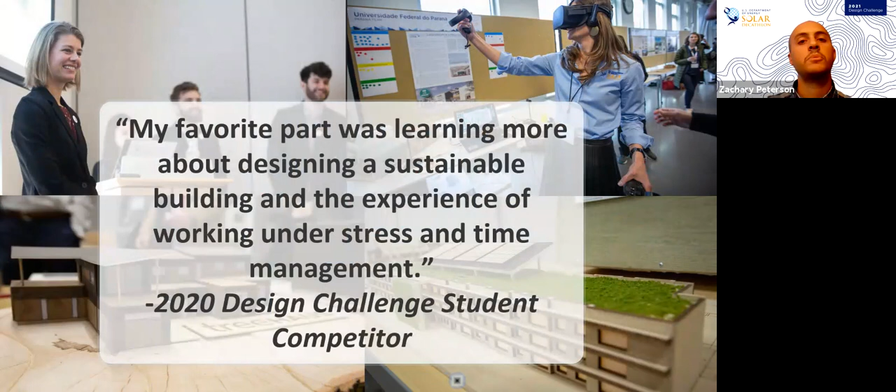So this typically includes engineers and architects, construction management students, business students, and they work together to do things like develop floor plans and design renderings and talk with clients about their needs and present their ideas. And industry partnership is a huge aspect of this. So we encourage all teams to work with a number of industry partners.

This could be builders, this could be city officials, energy auditors, landscapers, all different types of people from industry who can help them and provide feedback and review their designs and help them improve their solutions. And this really helps to develop a cycle of career connections for the student teams and help them develop their professional networks. So not only with the students, but also the jurors.

Well, we're excited to announce that we're continuing our Design Partners program. And this is a unique form of industry partnership where an organization or a builder might have a planned or expected project in their portfolio, and they connect with the team and work with this team to define the design criteria and come up with a zero energy design alternative.

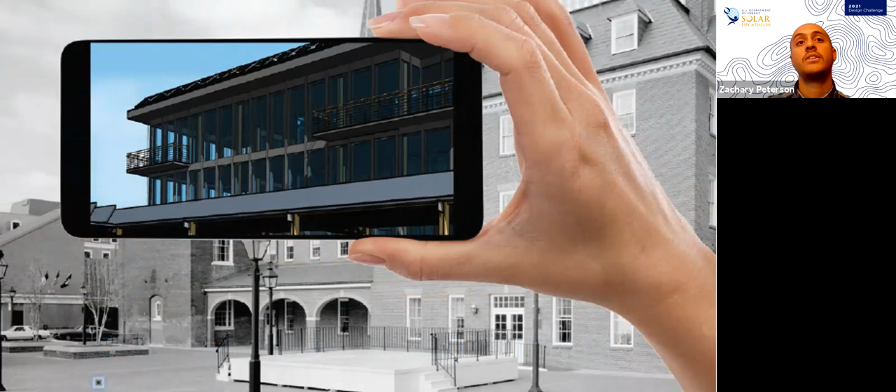And what's awesome about this project is it helps increase adoption of zero energy buildings because it helps reduce this fear of the unknown that some organizations or builders might have with developing a zero energy design and what goes into that and how much it costs. And so there's a low risk opportunity. And so as a design partner, you get to explore these zero energy topics. You get to explore these designs.

You get a design that shows you what are the utility bill costs? What is the lifetime energy consumption? How does this compare to something you typically see? And meanwhile, you are helping train the future generation of builders. So you might be thinking, well, what's the catch? There really isn't one. This isn't a huge lift for the design partner.

We're asking for 20 to 30 hours of commitment over the competition period, which isn't a huge bit of effort, but to help the students really dial in on what you are looking for. And so, Amanda, how can folks get involved with this? Yeah, so how it works is an organization interested in applying to become a design partner can go to solardecathlon.gov and find the design partner project application where they fill out project requirements and contact info that we can then share with the teams.

Following that, the student design teams interested in collaborating with the design partner will reach out to you with that contact information you provided and begin that initial connection and establish a partnership. Once that partnership is established, the design partner works with the student design team and meets with them over the next 4 months to go over iterations of the design, and the design partner attends design charrettes and provides review to the student design team as they go through the design process until the final competition event in April.

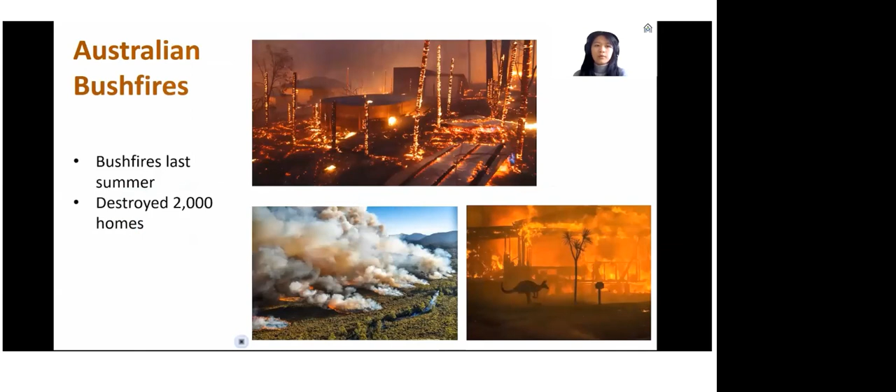Hi, we're Surreal Estate and we'll be presenting to you our single suburban family home design from the Solar Decathlon last year. I'm Sarah and presenting with me today are Sandy and Shrishti. Our team is a multidisciplinary team that came together in 2019. We draw our knowledge and skill sets from a variety of disciplines, including architecture, civil, mechanical, and materials engineering, as well as science. We come from Monash University in Melbourne, Australia. As I'm sure you'll all remember, the Australian bushfires last summer were devastating, not only taking the lives of many, but also destroying over 2,000 homes. To address this, we wanted to create a bushfire resilient home that was affordable for young Australian families.

So our main approach to making this net zero energy house affordable and accessible for these young Australian families was to implement various passive energy reduction strategies throughout the home, and we adapted it to be suitable for the local Australian climate. To do this, we took a holistic approach to our design, thinking about the before, during, and after a bushfire.

So not only do we have preventative measures in place before a bushfire occurs, we also made sure that our house is resilient during and after a bushfire. So some examples of preventative strategies include a 15-feet fire break that keeps the house away from high energy sources, as well as a gutter guard that minimizes the accumulation of debris in the gutter that can cause the roof of the house to catch on fire.

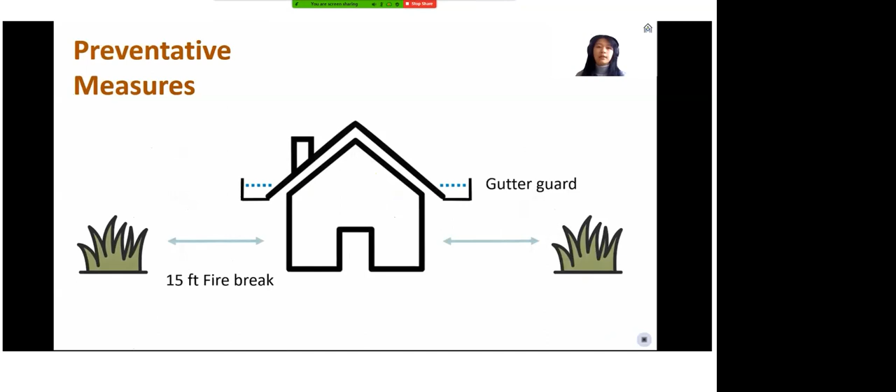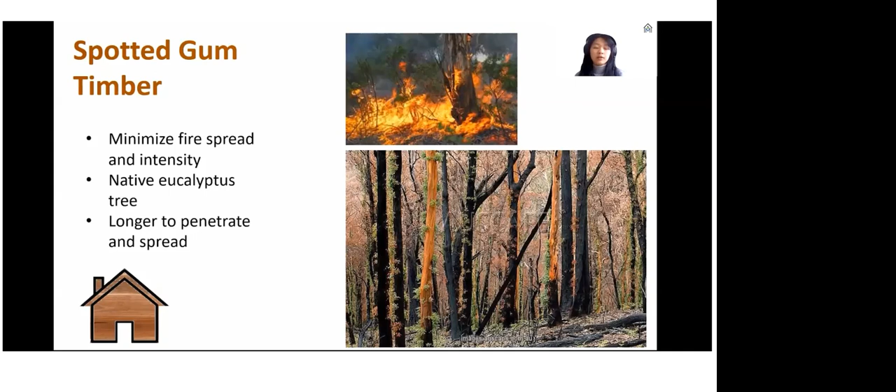If these preventative measures are breached and the house does catch on fire, we want to minimize the fire spread and fire intensity as much as possible. This is why we have most of our house constructed from spotted gum timber. It's a native eucalyptus tree that can survive bushfires because it takes so much longer for the fire to penetrate and spread than other common species of timber.

So not only do we want to minimize damage to the house, we want to prioritize occupant safety. This is why we have things such as an external sprinkler system and large casement windows for the occupants to safely escape. Now, let's consider the aftermath of a bushfire. Even though the house may be damaged, another reason why we chose spotted gum timber for a bushfire resilient house is that it's much easier to reconstruct and restore a timber structure compared to other sustainable materials, as ironic as it may seem that we're using wood for bushfire resilience.

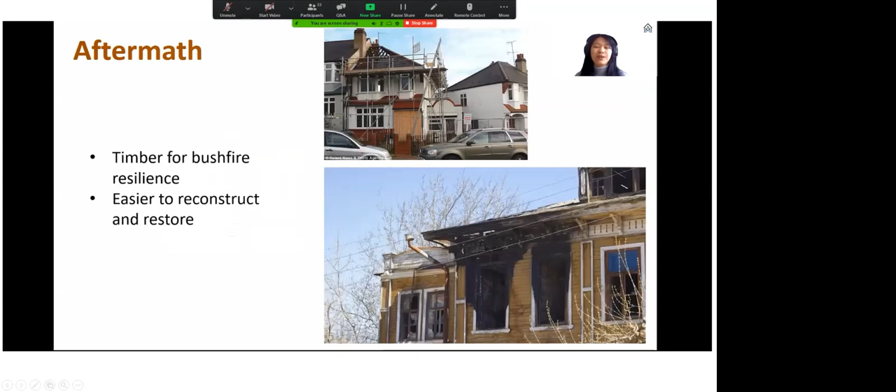Another concern is the water shortages that are likely to follow a bushfire, which was the case last year. That's why we have our 1,800 gallon rainwater tank, which is not only a staple in Australian backyards, it will allow the occupants to go off-grid for 2 to 3 weeks. Now I'll pass it on to Sandy.

Thanks, Sarah. So we wanted to know how much a bushfire-resistant home would cost the average new Australian family. Melbourne's housing market is ranked as one of the most severely unaffordable in the world, and this is based on the house price to income ratio. It can be roughly compared to the house market in Santa Cruz, and this makes affordability all the more important.

We designed this house for the suburb of Tarneit in Melbourne, Australia. A review by The Australian estimated that Tarneit was one of the suburbs tipped to experience above average growth in the next 12 months. We chose Tarneit because it is predicted to be 15% more affordable than inner city Melbourne. This makes it perfect for our particular demographic.

The total construction costs are approximately $196,000, and this is just over the lowest bracket cost to build a home in Victoria. The average home in Tarneit costs approximately $277,000. We believe this is a conservative estimate and suitable for the mean household income in this area. Now I'll pass you over to Shrishti to discuss our sustainable strategies.

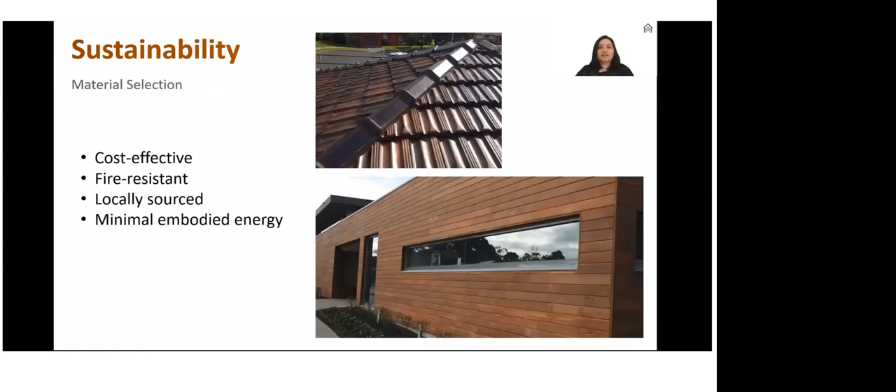Thanks, Sandy. The materials chosen were compared for their architectural properties, overall cost, recyclability, and most importantly, fire resistance. We chose to ensure that all the materials were locally sourced to support Australian businesses and to reduce energy costs. The materials were then meticulously refined to veto non-renewable materials and minimize embodied energy.

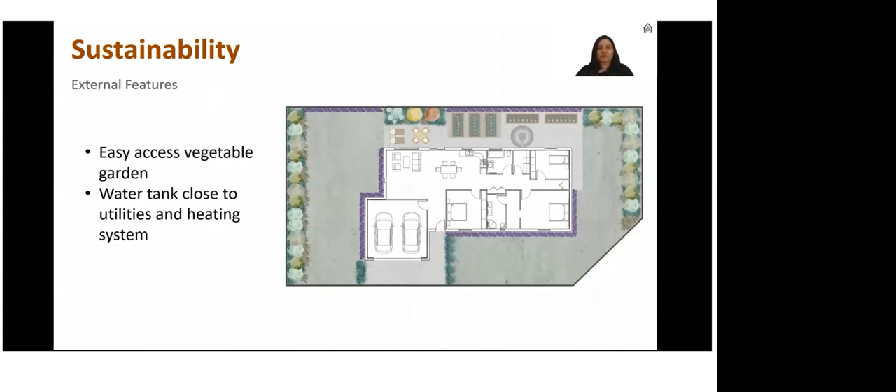By including a vegetable garden and a water tank, we encourage agricultural education and a self-sustaining lifestyle. Additionally, the water tank was situated in close proximity to our water heating system and our utilities for easy everyday use of reclaimed water. One innovation that our team decided to use was the introduction of an app. This app gamified water usage and energy conservation, thereby creating a family-friendly way to promote a more resource-conservative lifestyle.

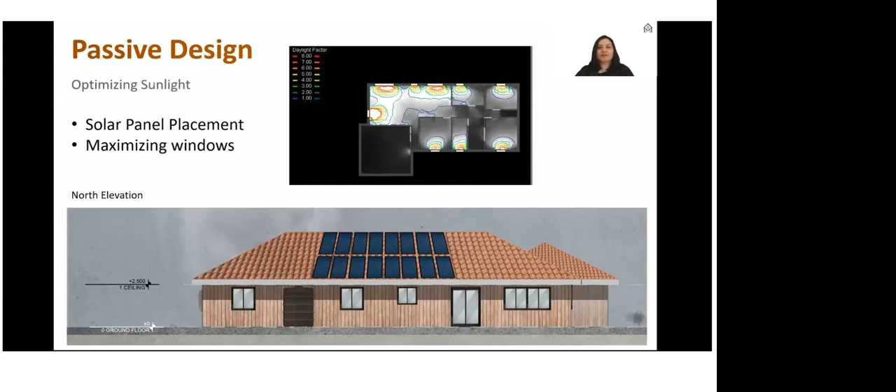While the features of the house were important in maintaining sustainability, the inherent design optimized the use of natural resources for passive energy reduction. One passive energy reduction strategy was to maximize thermal energy from the sun by utilizing the north-facing side, as this side gains the most sunlight in the southern hemisphere. Placing larger windows on the northern front optimized passive heating from the low-lying sun in Australia's cold winter months. This also minimized sunlight penetration during the summer.

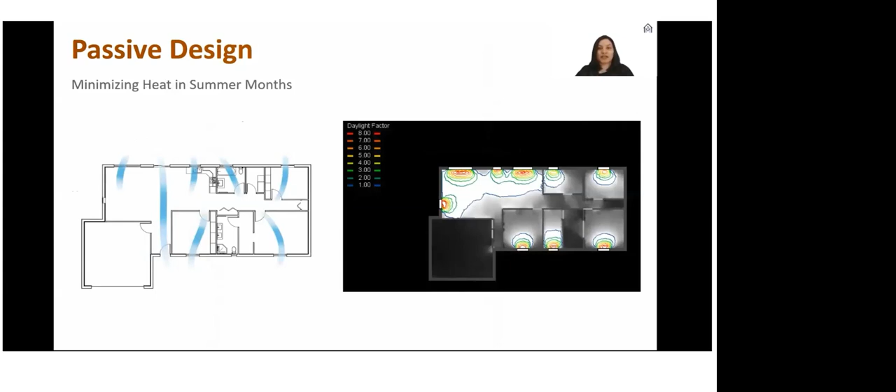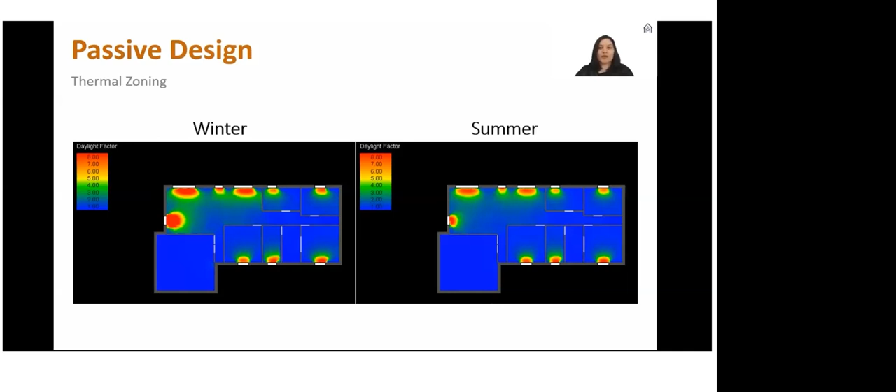By also including pathways for plenty of cross-ventilation, we further mitigated the retention of heat in Australia's hot and dry summer months, thus allowing families to enjoy a cool and comfortable internal temperature range without excessive use of the air conditioning system. Additionally, we chose to implement thermal zoning as a feature to help conserve energy. Each room was designed to ensure that only the spaces that were being occupied were being air-conditioned or actively heated. This removed the issue of wasted energy, wasted heat, and wasted cooling.

Another strategy that we implemented was to ensure that all of our water utilities were centralized as much as possible. This further minimized heat loss from hot water traveling through our plumbing, and thereby reduced the amount of materials required for the construction of internal water systems of the house.

In conclusion, we have designed a resilient home for young Australian families, one with net zero energy, affordable pricing, and necessary fire resistance for an ever-changing Australian climate.

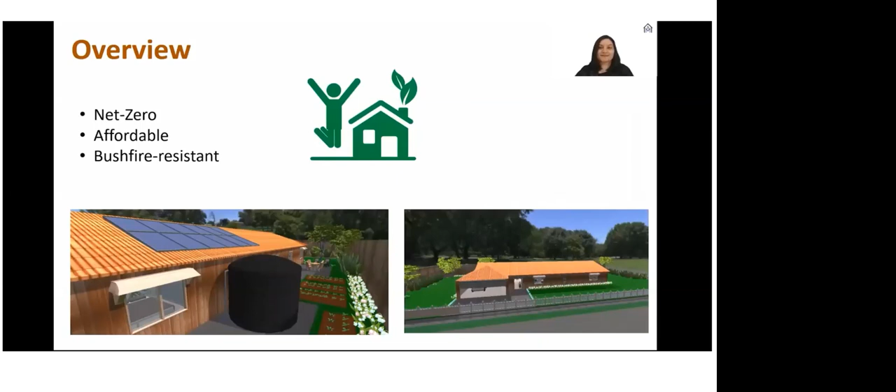Wow, what a presentation. That was awesome. Thanks to the Surreal Estate team. As we said, unfortunately, they're not around to answer questions at this moment. They're probably all in their beds and sleeping right now. But if folks do have questions out there, we would love to connect you with them or send those to them and close the loop on that.

But we will keep moving here on to the division winner in the mixed use multifamily division, the University of Arizona. So this was Team Sunblock with the University of Arizona, and their design on the loop delivered a realistic design portfolio and honored the Southwestern vernacular. Ellie Franzen and Rachel Schultz will be presenting their team's design, the loop. Ellie and Rachel, are you all ready?

Hi there, can you guys enable our video? Yeah, I'm sure someone's working on that in the back end here. I can do that. We can hear you all right. Okay, now there we go. Perfect. There we go. Yep. So we have the slides up. Are you guys ready? Oh, we are ready. Yes. Okay, there you go. All right. Okay.

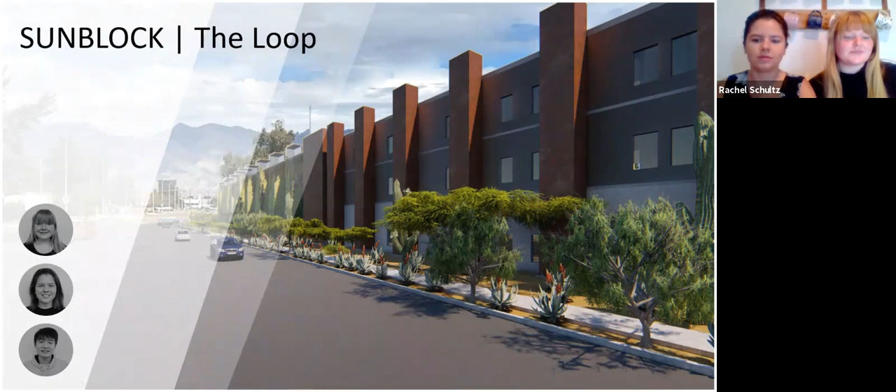Hi, I'm Ellie Franzen. And I'm Rachel Schultz. We're excited to share our project Sunblock at the Loop with you. This project was our first attempt at creating a mixed-use multi-family housing development that helps sustain its neighborhoods by providing solar energy, community spaces, and social resources. Our hometown is Tucson, Arizona, 2 hours south of Phoenix. The site we chose represents familiar challenges faced by American cities suffering from increased urban sprawl, a lack of walkability, and a lack of public infrastructure.

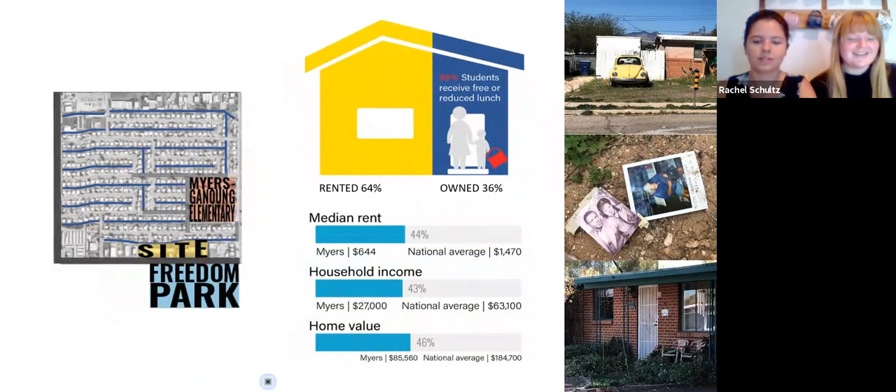Our site was originally home to a vacant strip mall resting on 250,000 square feet of asphalt. The surrounding Myers neighborhood is a diverse and vibrant community with Myers Elementary School and Freedom Park as some of its only community resources. Made up of 396 low-income homes, families in the Myers earned 43% of the United States average median income. These homes, resources, and our site are connected by utility easements. We approached this project with an understanding of Tucson's unsustainable growth pattern shown on the diagram on the left, which allowed us to see where we can make efficient changes and redirect Tucson and other urban city centers.

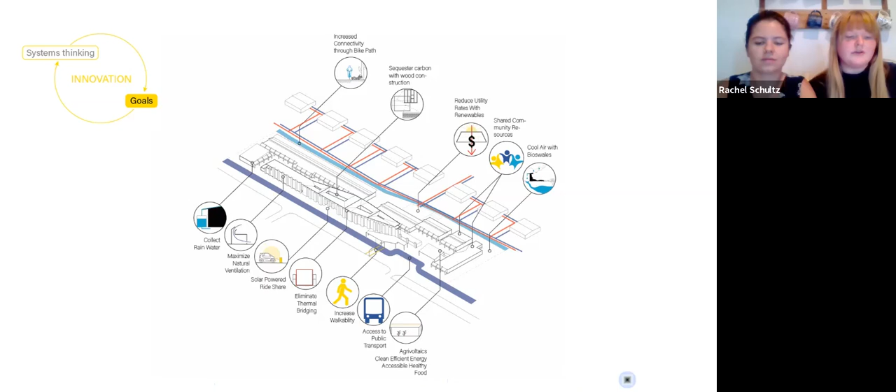These categories have a unique and important relationship with each other, coming together to create a system where each component plays a role in the project. By viewing each category as a part of a whole picture, we can maximize the benefits of individual elements and create a better whole. In combination with the district energy system, Sunblock, this project is proposing an innovative growth template for low-density cities and suburbs. The proposed template encourages builders to design locally, taking advantage of material, thermal, and environmental processes already present. The loop is successful thanks to a set of goals that prioritize sustainability and community among its residents internally, as well as the surrounding Myers neighborhood externally. Our goals coming into the project manifested themselves in a retrofit of the existing strip mall alongside a new build, both performing at PHIUS 2018+ standards.

The Sunblock District Energy System proposes using the excess solar energy produced during the middle of the day to heat or chill water that is then stored and used to condition the Myers neighborhood. By producing enough solar energy with on-site PV arrays shown in yellow, we can cleanly condition the entire Myers neighborhood. To maximize energy use efficiency when conditioning with cost-effective balanced ventilation, creative solutions are utilized in both residential and commercial spaces. In the office, supply ducts run under a raised platform and air is exhausted near the ceiling, creating a natural convection loop.

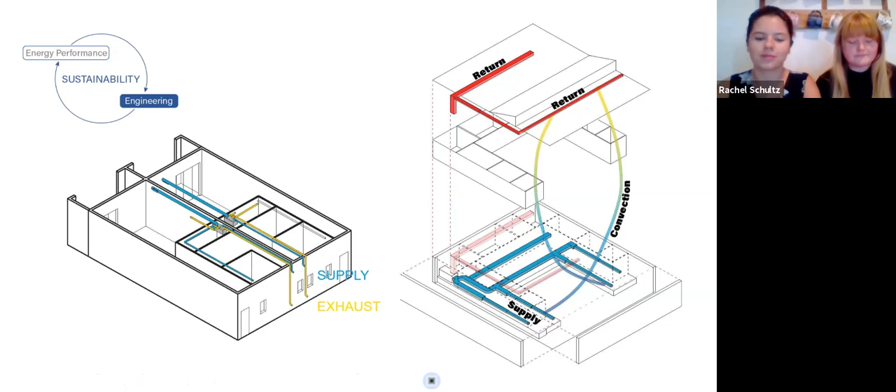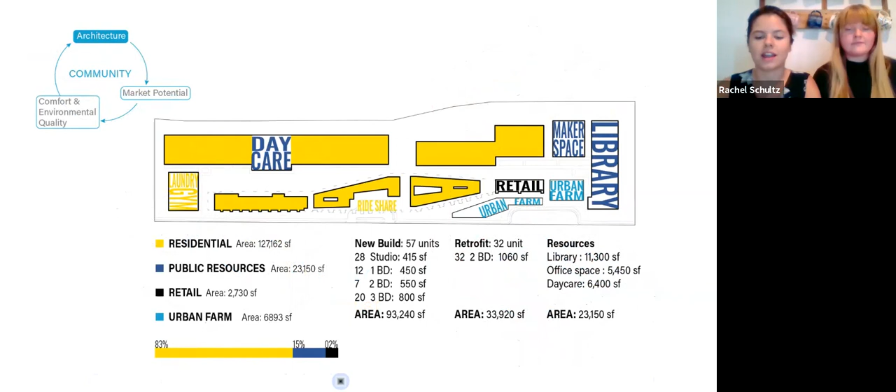In total, the loop offers 89 units consisting of studios as well as 2 and 3 bedroom units. These are centered around our daycare and community resources. The right side of the lot offers public resources to the surrounding neighborhood, including an agrivoltaic urban farm, bus stop, library, retail, and office space.

The new build celebrates passive natural ventilation with recycled metal solar chimneys serving residential units on the southwest facade. These chimneys reference the local tradition of using rusted metals while also taking advantage of its recyclability and resilience. This language is continued down the south facade with shaded patio spaces clad in recycled metal and native vines.

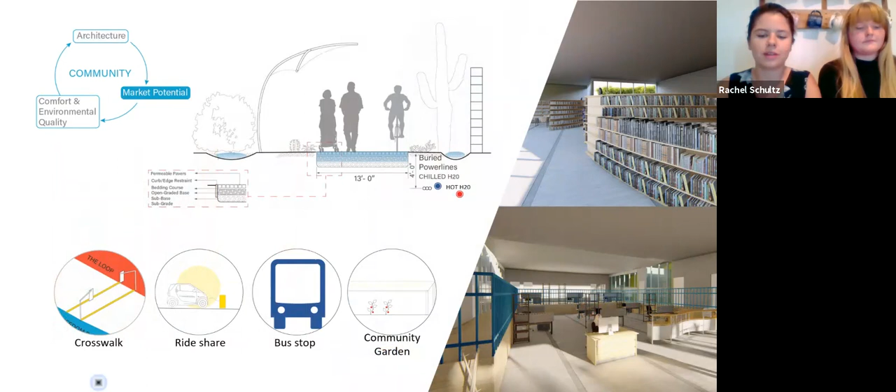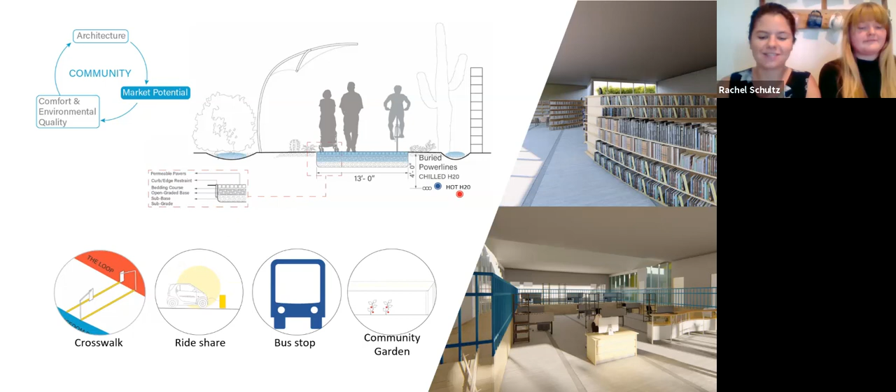The Loop offers community resources on site, such as an office, retail space, daycare, and public library. These resources connect residents to their city by improving public transportation in a car-dependent urban setting. This is accomplished through an electric car rideshare, a new crosswalk, a reimagined bus stop that includes a community garden, and an extensive bike path designed from existing utility easements.

The Loop focuses on the Myers community while also acknowledging Tucson's need for affordable housing. Our rent reduction program allows us to cater to three often overlooked demographics, including single-parent households, the elderly, and Tucson residents who can no longer afford the rising cost of housing.

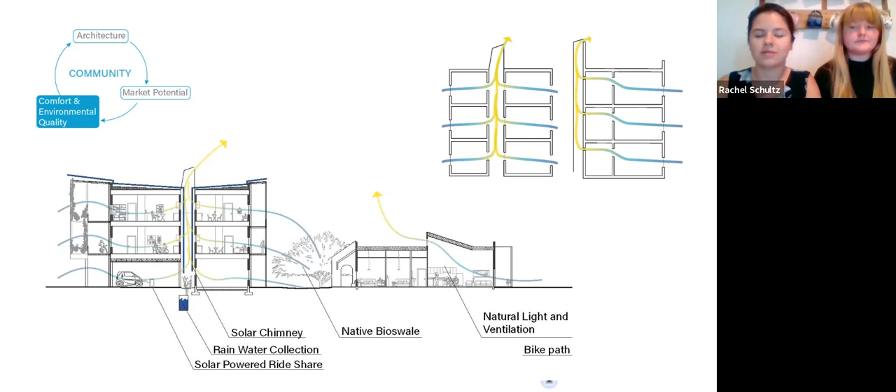Blurring the lines between indoors and out helps us understand how the outdoor environment can reduce our energy usage while also providing a pleasant place to live. Lush bioswales and solar chimneys strategically placed on site work together to create a comfortable environment. Within each unit, design choices like VOC-free and natural building materials, natural daylight, and balanced ventilation, along with natural ventilation, come together to create a comfortable indoor environment for residents.

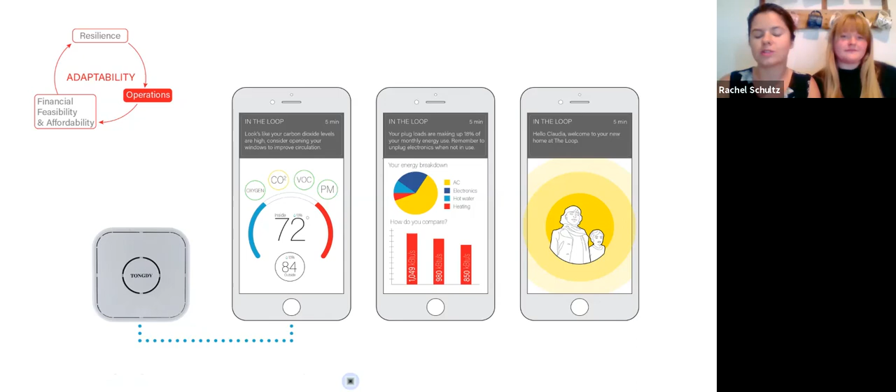The Loop is financially feasible and affordable. A unique ownership profile puts residents in charge of the Loop, keeping financials focused on their goals and putting those motivated to develop the Loop in a place of leadership. Monthly utility rates are low thanks to Sunblock, which averages only $100 a month for gas and electricity.

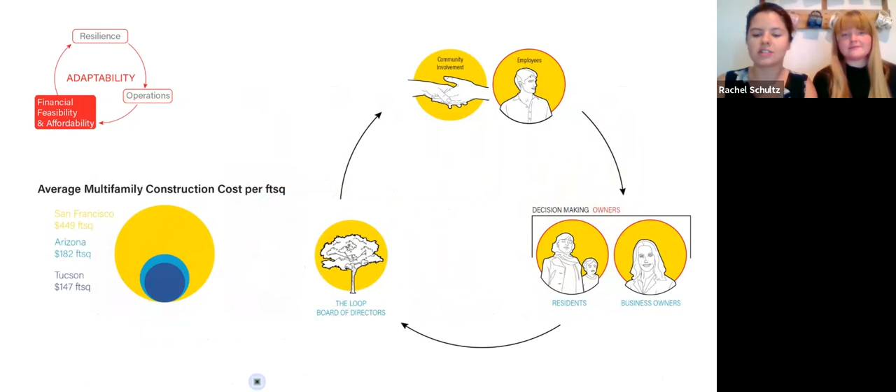Resilience is exemplified through climate-based material choices and landscaping that reduces common floods in Tucson and pollutants while recharging the water table. By utilizing WUFI energy modeling, Sunblock allows the Loop to constantly provide a comfortable environment even in the event of a blackout or grid failure. Through WUFI and theoretical climate data, the Loop is preparing for climate change 60 years into the future, confirming the Loop will always be running at PHIUS+ 2018 standards.

In addition to this, the use of airtight units and balanced ventilation ensure clean air for each resident, reducing the risk of community outbreaks during pandemics. By understanding that no one component will be at its best individually, the Loop aims to empower the individual, create an influence in the community, demonstrate a positive change, and finally become not only Tucson's new growth pattern, but a template for sustainable growth in cities around the world.

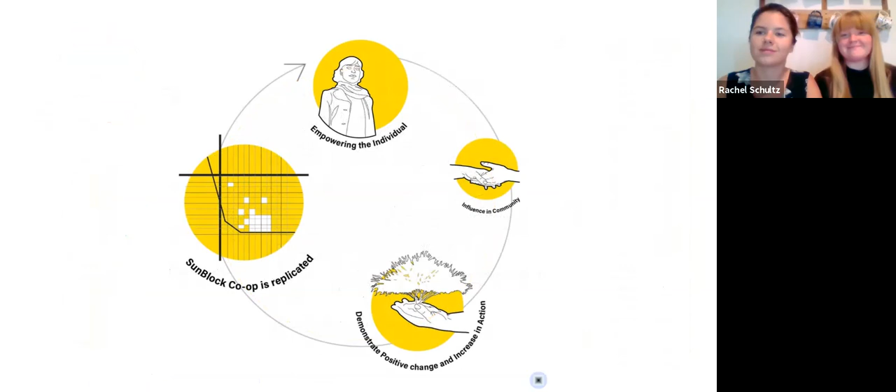Thank you. Thank you. Great work. Yeah, it's just really awesome to see your guys' energy and enthusiasm since the design challenge. Great work, guys. We're so excited about it.

So, question from the audience here. What do you think about your method and approach to this project that resulted in you guys winning your division? So we feel like one of the things that really made us stand out when approaching this project was our really holistic systems thinking.

We started way zoomed out with those feedback loops, and we were thinking really big picture, like what about people's lifestyles right now is not encouraging them to live sustainably, and what can we put in a building that is going to facilitate a whole new lifestyle. Yeah, it was

our enthusiasm for the idea that you can take systems thinking, which is a natural science theory of how natural systems in the world work, and apply it to every single aspect of architecture and every single aspect of high performance design, understanding that even the output of hot air from some kind of mechanical system can be used somewhere in a way that is efficient. So trying to understand each element as a whole really helped us approach this project.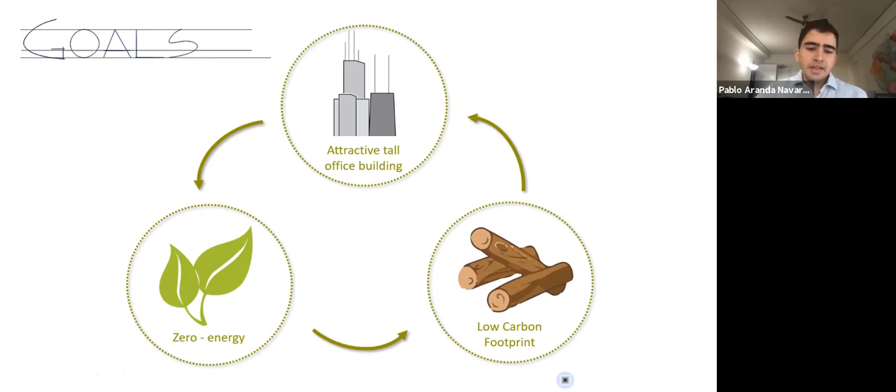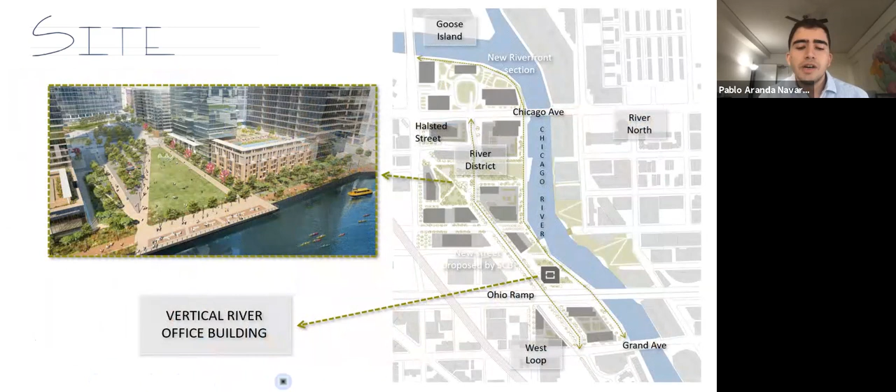In a first step, we focused on industrial areas along the Chicago River, intending to return these spaces to citizens. We located an area close to Chicago's financial district, the Loop, where there is a project currently being drafted by SCB architects, the River District. We contacted SCB and they gave us their permission and guidance along the process. The plot where the master plan is located, on the west bank of the Chicago River's north branch, is surrounded by major streets with easy access to multiple metro, bus, and bike lines. The plan proposes a new section for the Chicago Riverwalk, a new street, and a new plaza, providing green areas for residents.

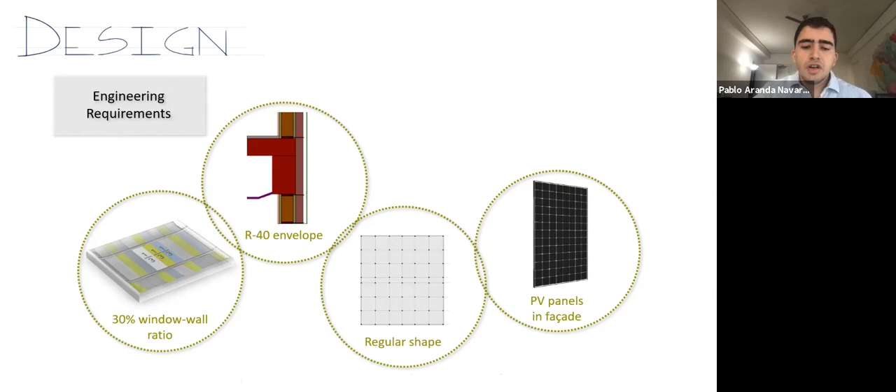The shape and the window wall ratio, however, limit the natural light in the center of the building. We created a series of open public spaces to bring natural light in. Around the core, we placed a 14-story atrium supported by 4 perimetral 3-story winter gardens that spiral up through the height of the building. This solution also allows cross ventilation.

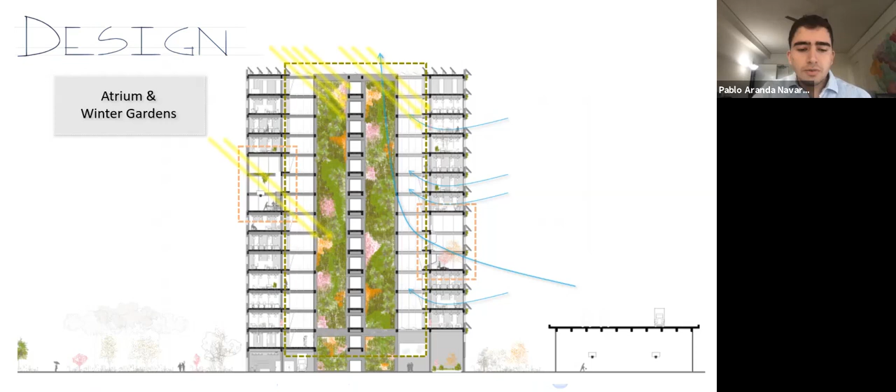With this basic layout design, we had 2 issues to solve. First of all, the integration within the SCB master plan. Our analysis had broken with the master plan's orientation, so we did 2 important moves. We changed the corners in floors 1 and 2, eliminating corner columns, and we placed the public program and art gallery towards the Riverwalk.

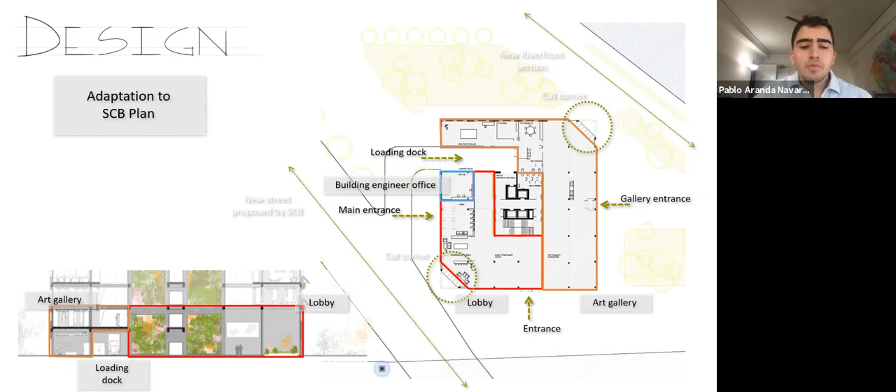Secondly, we had to integrate PV panels in an attractive facade. Our design decision was dividing every story in 4-foot strips and using each strip as either window, PV panel, or green wall panel. Plants in the green wall completely change the strong cold image of glass and PV materials and improve thermal performance. The 4 facades have important differences.

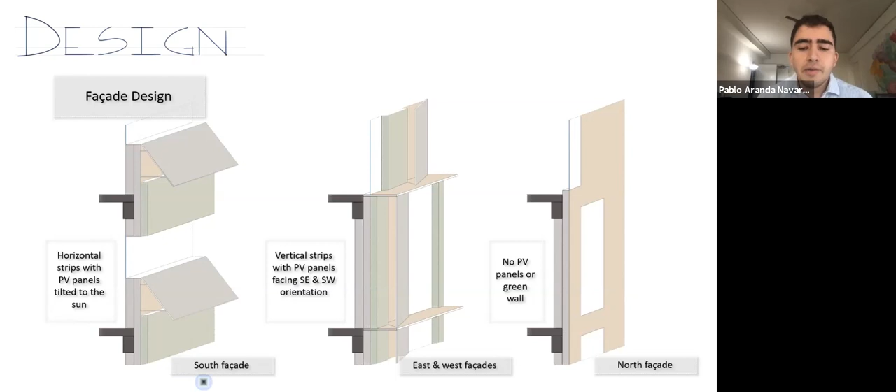The south facade is divided horizontally as PV panels are tilted to the sun to improve efficiency. East and west PV panels are tilted vertically, looking for a better exposure. Thus, the facades are divided vertically, and alignments can change every few stories. The north facade has no PV nor green wall. The wall detail is composed of a double facade assembly which contains a sandwich panel of OSB, a continuous rigid stone wool board, a continuous water membrane, an air barrier, a composite cladding, and high-efficiency double pane windows.

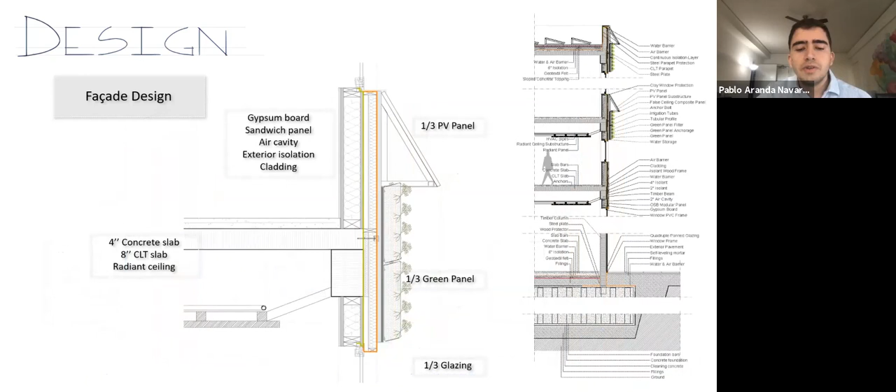The cladding is either finishing or a layer before the PV and the green panels. To sum up with the design, every general floor is composed from inside to the perimeter by the core with stairs, elevators, and systems, the atrium, a perimeter corridor, and 20 feet by 20 feet units with office program. This unit can be customized just changing the furniture layout and some light partitions.

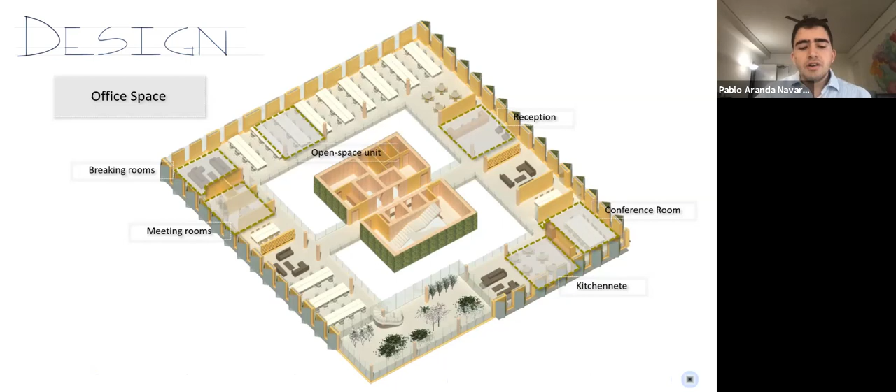Now, my colleague Fengyuan Jiang will explain HVAC and the energy analysis. Thank you, Pablo. The primary HVAC system takes advantage of the building's proximity to a river and consists of a water source heat pump, which uses the river as the main source. The loop goes from the 15th floor, which is kept entirely for mechanical purposes, to the river at 10 feet depth to find constant water temperature during the year.

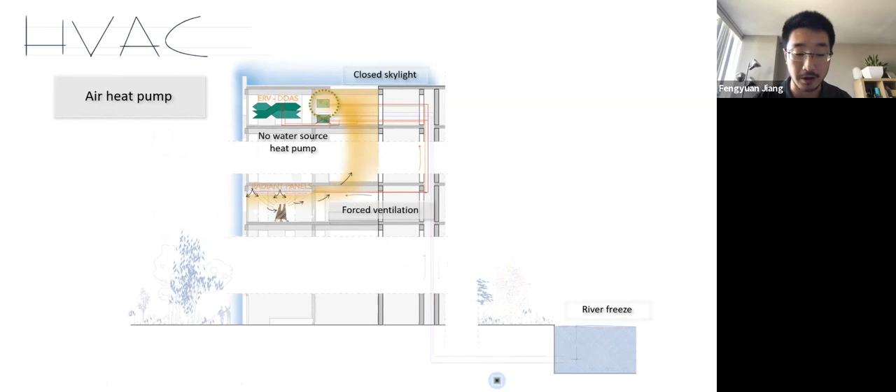And in extreme Chicago winter conditions, if the river freezes, the water source heat pump will become unusable. So in those conditions, the same heat produced inside the building will be exhausted through the atrium, and with the skylight closed, it will remain in the 15th floor, where an air source heat pump will operate.

The secondary HVAC system is a radiant ceiling, which acts individually in every 20 feet by 20 feet unit, coordinated with sensors in order to act according to each unit's occupancy and needs. This system will be coordinated by the building engineer and can be regulated in a limited way by the tenants.

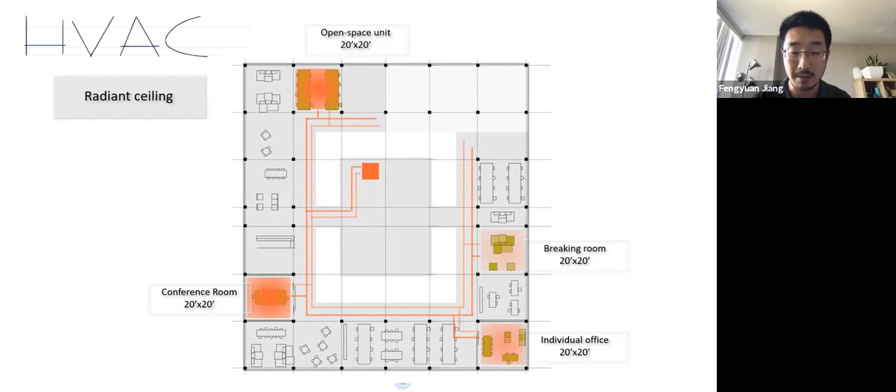The on-site renewable energy comes from the PV panels and biomass. PV panels have been studied with PVsol, considering every different surface with its particularities, giving as a result a yearly production of 2.5 million kBTU, which means 16 kBTU per square foot.

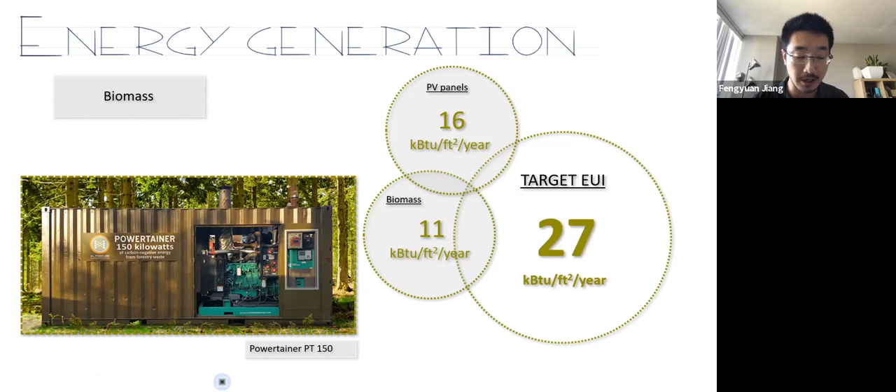The biomass energy comes from a Powertainer PT 150 placed on the 15th floor. It will use wood pellet waste, which is particularly present in Illinois. The loading dock and the service elevator allow a good working flow. The Powertainer will add up to 11 kBTU per square foot per year, for a target EUI of 27.

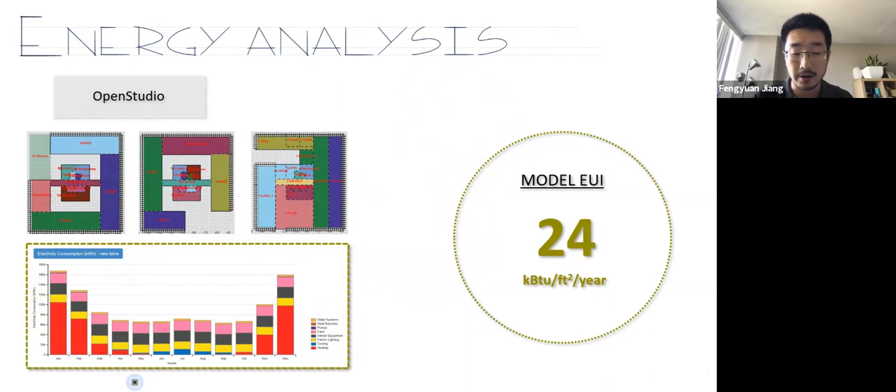So in the OpenStudio model, we included the passive strategies, such as orientation, geometry, window to wall ratio, a tight envelope, daylighting, and natural ventilation. We also included the HVAC system. When compiling all passive and active strategies, the resulting EUI is 24 kBTU per square foot per year, lower than our target EUI.

Finally, we were able to perform a life cycle analysis. We computed all the materials from mass timber to steel, glass, and concrete in the LCA software. Our building emits 296 kilograms of carbon dioxide per square meter per year, and is the letter C in our benchmark. So if we have accomplished our goals, according to the software result, the Vertical River office building is energy positive. Besides, mass timber construction considerably reduced the carbon footprint.

As designers, we do love it, and we know it's a subjective opinion, so we will let you judge by yourself. Thank you. It's been a pleasure. Thank you.

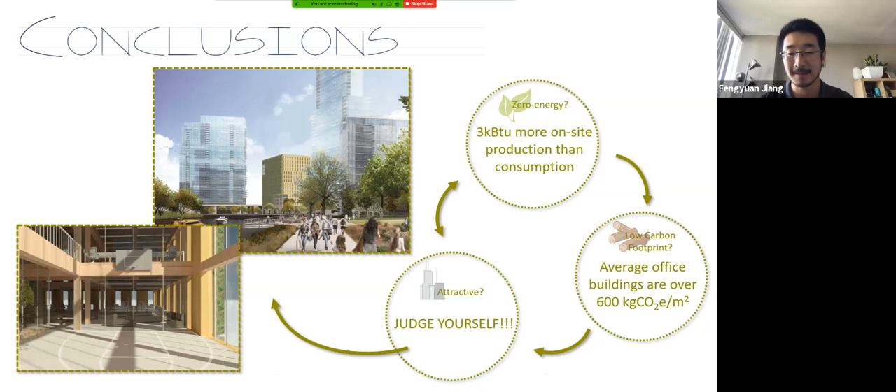Awesome. Thanks, guys. That was great. Fabulous presentation. I was just looking through some of the questions we have for you. You talked about a pretty complex HVAC system for the building. Can you talk a little bit more about the ventilation in the building and how it might differ from the summer season to the winter season?

Great. Thank you. It's a good question. Due to its aim to be a net zero building, we want to take advantage of natural ventilation as much as possible. The reality is that a city like Chicago has high temperatures during summer, while negative degrees in wintertime. So we did several CFD simulations to see if natural ventilation is feasible in all seasons.

After observing our results, like the temperature field distribution and the air velocity distribution, we made a ventilation schedule and cooperated with our architects so that if the data from the sensors show the outdoor environment is proper, the skylight will open automatically. The air will go through the winter garden, the atrium, and then the skylight. So natural ventilation is applied. And during wintertime, the skylight will be closed to make sure nobody's frozen and only the mechanical system is operating. Yeah, thank you. Awesome.

So how many stories were proposed for the building? We took the maximum possible by the competition guidelines, which is 15 stories. Okay. And did you guys look into the code in Chicago that would be allowed for timber? Yeah, sure. But of course, a 15-story building is not allowed in Chicago.

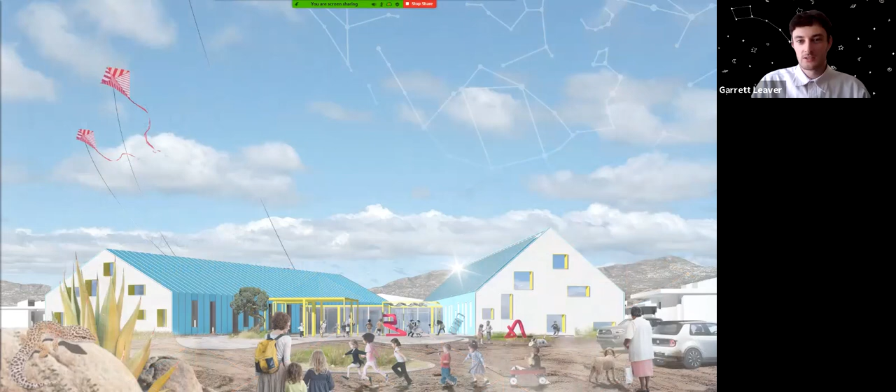And so are you guys ready? Yep, I think so. All righty, well, just say the word and Amanda will get started and send that first slide going. All right. Yeah, welcome to Little Dipper, everybody. I think we're ready to start the presentation. So I'm Garrett Leaver. And I'm Catherine.

Little Dipper Elementary acts as an interactive climate exploratorium where complex global challenges are broken down into kid-sized interactive exercises. We are so excited to share this project with you and could not have done so without our professor, Ihab Elzeyadi, our team member, Danielle Valdez, and colleagues at the University of Oregon.

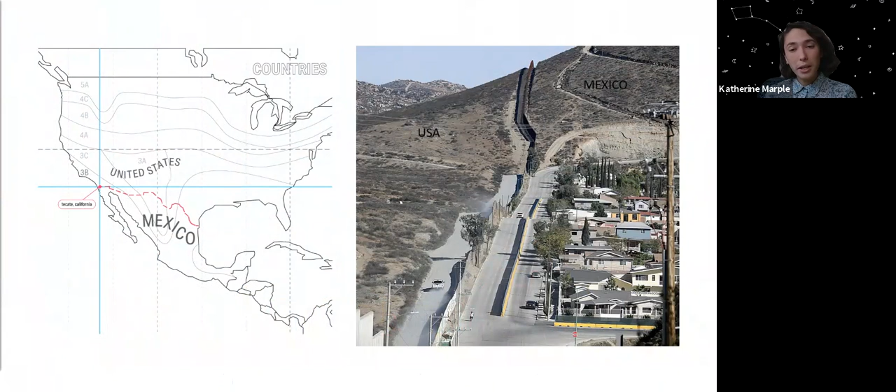Little Dipper Elementary is situated between Mexico and the United States in Tecate, California, where a hard line stretches almost 2,000 miles, dividing countries, cities, ecologies, and even families. In Tecate, a majority of students come daily over the border from Mexico to go to school in California. So climate change, border injustice, overconsumption, these seemingly incomprehensible issues humanity faces must be taught to children as they become the next stewards of the environment.

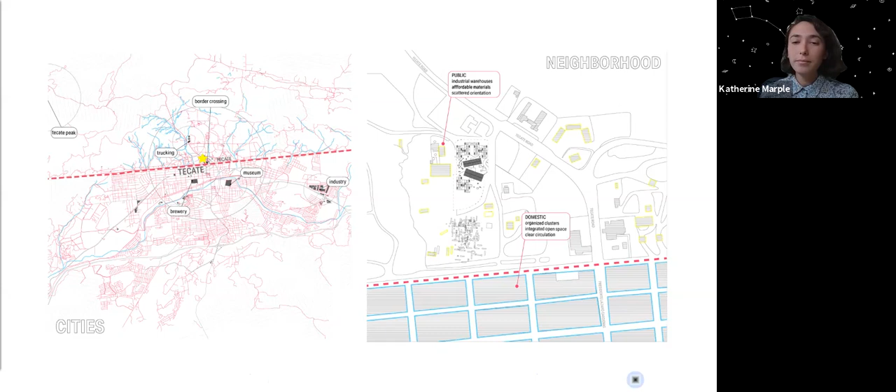But how can design teach children about global challenges? And how can the built environment help break down those big concepts? The school aims to do so by highlighting kid-sized interactive learning moments against a simplified neutral field. Five main design objectives guide the project: integrated reciprocal energy systems, students playing an interactive role, thresholds reimagined as inhabitable opportunities, integrating playfulness, and redefining beauty as affordable, accessible, and contextual.

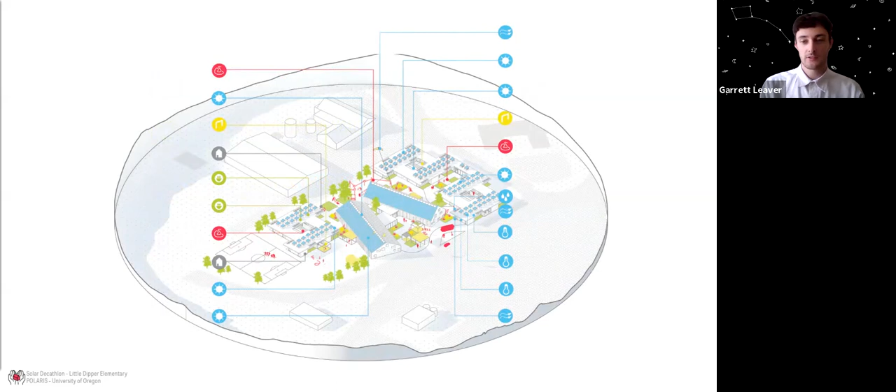These objectives guided our choices for smaller components, systems, and the simple architecture that became the field for colorful and playful interactive specimens. The school achieves a net EUI of -10 by minimizing conditioned space, utilizing passive systems, and a simplified construction methodology. Playful innovations, such as the stewardship wheel, allow students to adjust climate control systems by cycling through modes, with indicators letting them know about wind, temperature, sunlight, and noise. Regular student participation in daily maintenance and operations contributes to a lower overall cost.

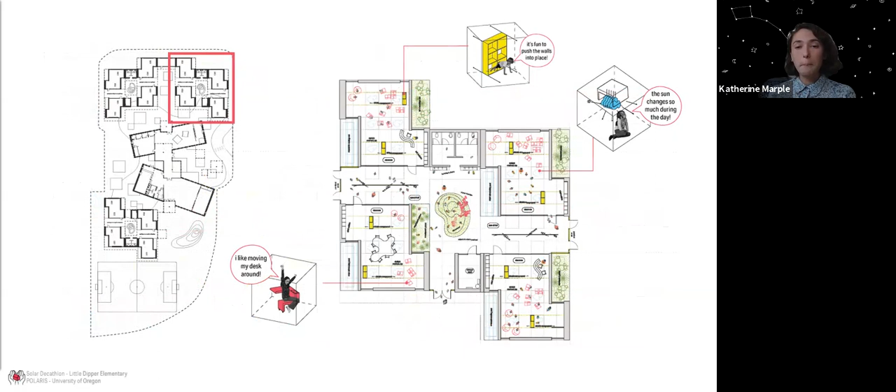Pods of 4 classrooms create micro-communities of students and staff. Accessibility and simplicity drive the design of the structural and mechanical systems. And following passive house principles combined with prefab wall assemblies, walls are designed to maximize thermal insulation and affordability. The classroom itself becomes a home base for intentional learning with its environmental systems integrated into the curriculum. Cubbies and a cleanup station would greet the students as they arrive. Sliding storage panels push and pull to create customizable breakout spaces, and a ratio of solid versus glazed wall allows for plenty of pinup space as well as daylight.

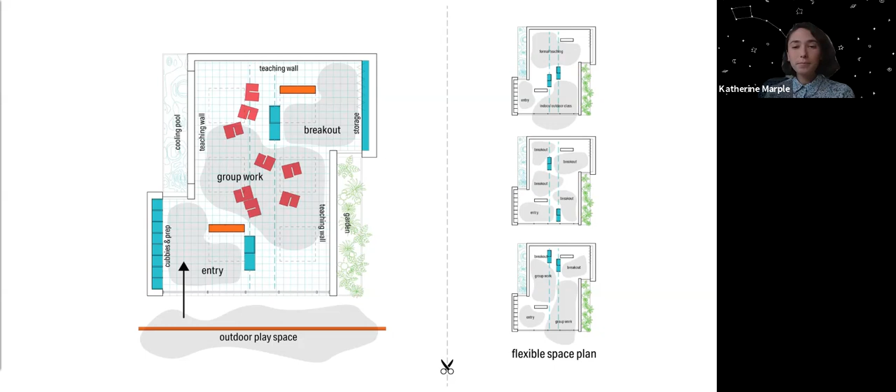Radiant floor slabs make the classroom cozy. In cooling mode, passive chilled beams cool rising hot air, and low windward supply vents sit above an evaporative cooling pool. An energy recovery ventilator would provide fresh air, and operable roof monitors would provide evenly distributed daylight and natural ventilation.

Inside, the learning moments take the form of interactive and functional objects. The desks would interlock with each other to allow more open space, while also being able to move around and keep supplies from spilling. The storage panels act as partitions as well as teachers of organization, and the picture windows would provide glimpses of fun activities happening outside.

In the courtyard, adjacent classes of students share artwork on a panelized pinup wall, roll back the shading device, play on the mound, gaze at the reflections in the cooling pool, and learn how to grow vegetables and herbs in the garden. This central courtyard also acts as a unique identifier for each classroom cluster.

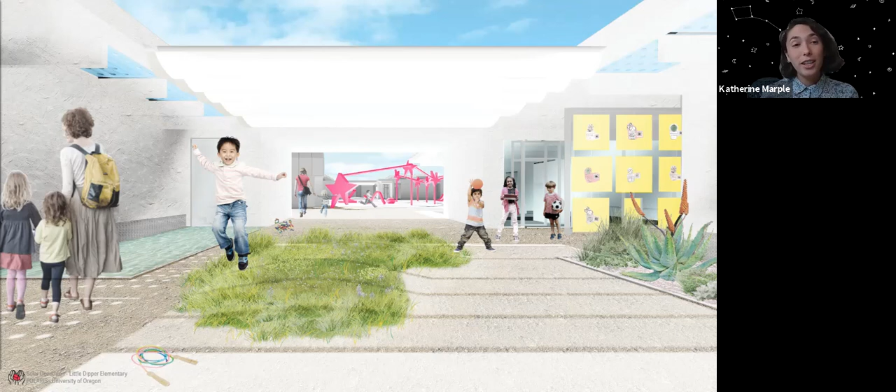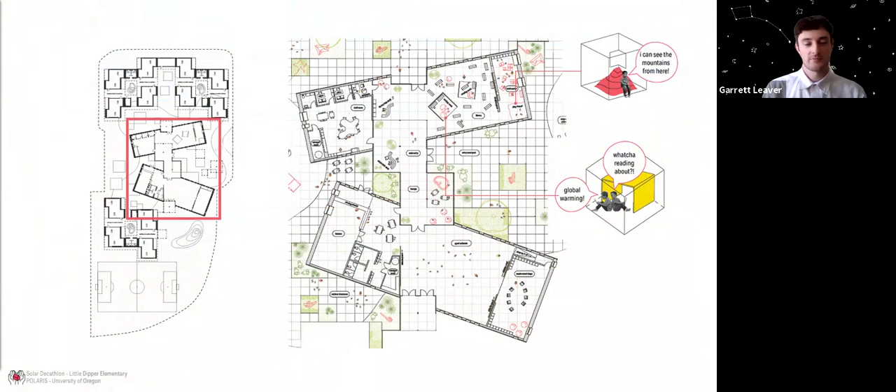Nestled within the classroom clusters, the community cluster serves as the prominent face and entry of the site. As students and faculty, as well as community members enter, the central core welcomes them to the gym, cafeteria, and library, which work together to serve as large collaborative spaces. These two buildings are meant to bring together students and community from both cities.

In the community buildings, we wanted to reflect and elevate the industrial vernacular. Due to the dynamic program, these buildings utilize a standard high-efficiency HVAC system, coupled with well-insulated wall assemblies. Inside, students participate in the maintenance of their public spaces through interactive acoustic clouds and composting toilets.

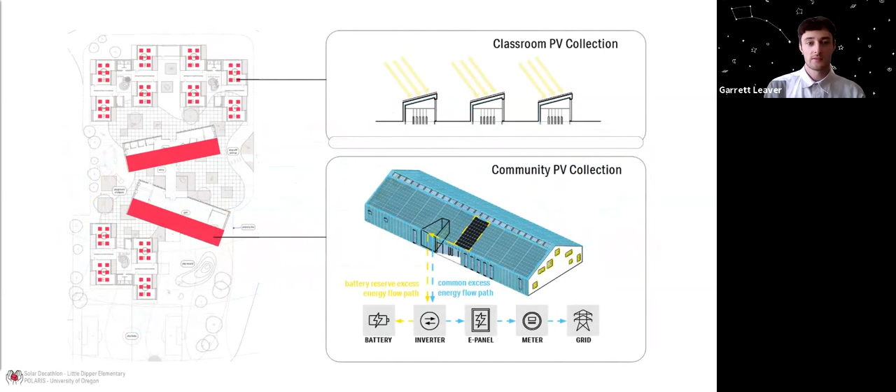Outside, solar panels covering the south-facing roofs generate more energy than needed for building functions. Excess solar energy is sold back to the grid, while some send their unused energy to an on-site battery in the event of a power outage. These panels provide valuable renewable energy in a rather remote location.

The Craft Center is a great place for students to paint and play, and the climbable pink mound provides a great place to read. In the library, students and staff interact with scattered blue bookshelves. In the gym, yellow sliding panels are pushed open and students prepare the elevated music room for a performance.

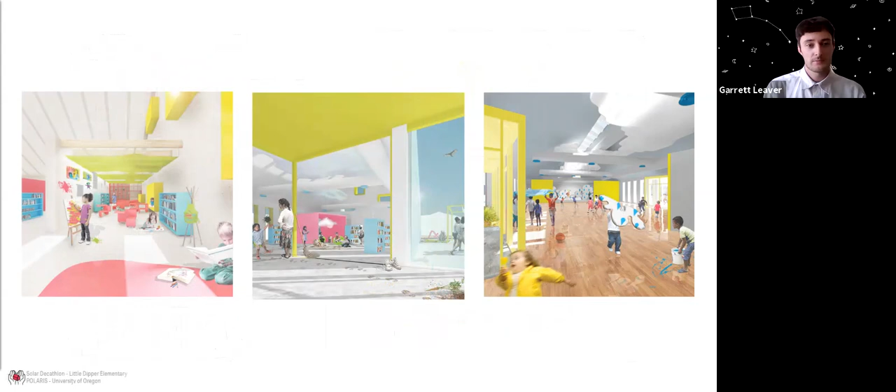With the help of RS Means, we estimate that Little Dipper Elementary would cost around $150 per square foot, meaning that this innovative school could be built for equal to or less than the average elementary school in the United States. We're able to achieve this figure by utilizing low-cost, durable industrial materials, which can be sourced locally and integrated with a prefabricated system.

We imagine this prefabricated system as a catalog of parts, where clients are able to select from standardized classroom components like walls, windows, and roof elements. Add-ons such as pavilions with various infill panels provide customization. This system could allow for easy phasing of projects or future expansion.

The catalog intends to be a framework for quality design, but it's not meant to stand alone. Final finishes, climate-specific requirements, and labor must respond to site context and be sourced locally. This combination of prefabricated and site-specific elements makes Little Dipper Elementary a potential prototype for net zero primary schools.

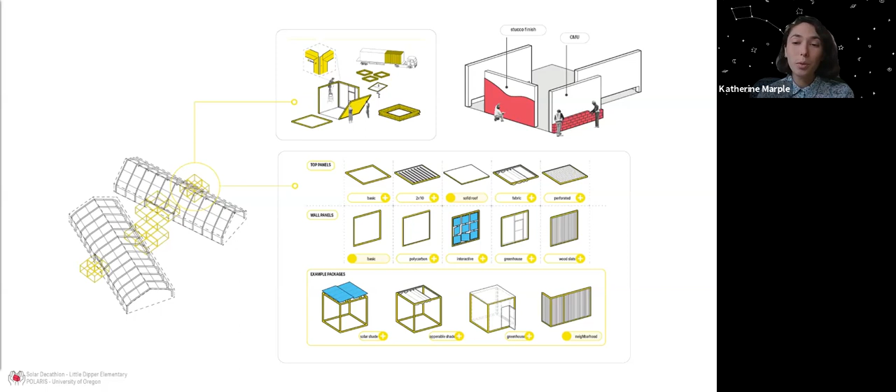We want to leave you with the importance of optimism and play. The opportunity to design for future generations made us realize we don't have all the solutions, but thinking positively of the future kept us motivated. Turning awareness into hope is hard, but that's what architects, artists, and engineers are for, to keep solving and innovating even when all hope is lost, even when a student has to cross a militarized border to go to school.

We have a responsibility to see the solutions, to stay aware, and to design spaces that encourage people to be actively engaged in their environment. Because when everyone is involved, the systems work. And when the systems work, it gives us the chance to play. Thank you.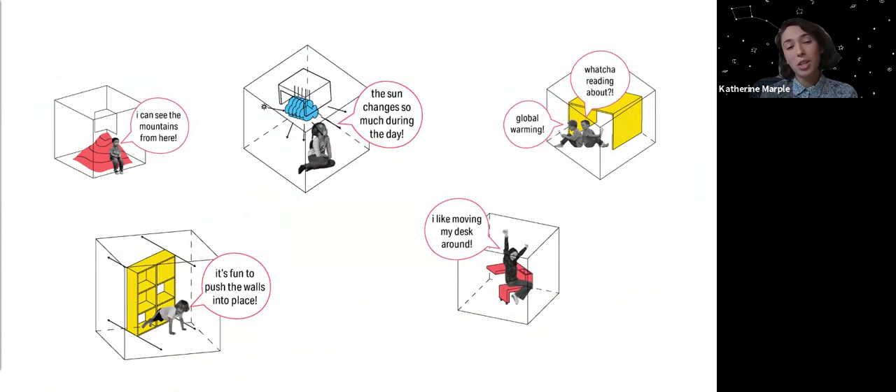Wow, thanks to both of you. That was fantastic. Continue to be impressed by this project.

So a couple questions for you here. So your design team was pretty small, right? There's only 3 of you, if I'm not mistaken? Yeah, wow, that makes it even more. Go ahead, sorry. I was gonna say we had 3 for the main project design, but then we had additional support during the competition phase. Okay, it's so small. So were there any takeaways, best practices or advice you have from being successful with such a small team? Yeah, we kind of have 5 key takeaways, I guess.

The first one is it was really important for us to establish this kit of parts from the very beginning. That was that list of things at the beginning there. And that was really important for us to establish this guideline that would guide us throughout every design decision, and would help us weed out all of the great advice and feedback we were getting from others. And so that kept us on a really clear goal. And even when we were designing a part, we were on the same page about what the end result needed to be. So that was really, really critical.

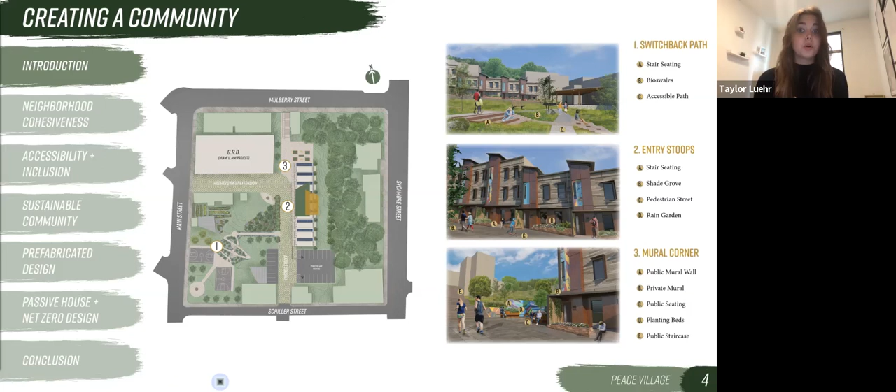So we've created a series of design goals that Peace Village has achieved, and we will use these goals to structure the remainder of our presentation today. As you can see here, there are neighborhood cohesiveness, accessibility and inclusion, sustainable community, prefabricated design, and passive house and net zero design. Taylor will now highlight how we have addressed the first of these goals.

Over the Rhine is known for its large body of historic Italianate architecture. Building here presents a challenge as there are numerous conservation guidelines that must be met. Our project took this into account by composing the facade in terms of massing, using community-inspired materials, and creating a contemporary take on traditional facade symmetry.

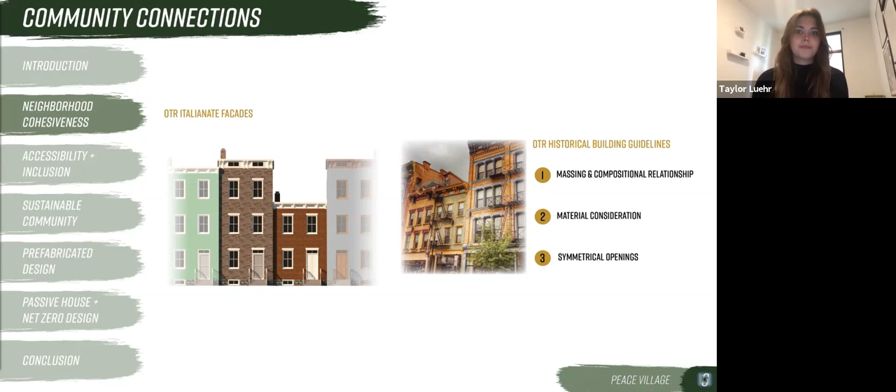You can see how our design incorporates the tactics that Taylor just mentioned, but these tactics are not the only way that Peace Village is directly connected to the community. Smaller scope aspects within Main and Schiller tie the residents together, such as a mural corner found in the existing Permaganic garden, which was then imposed on all unit facades and referenced in the mural corner on our site.

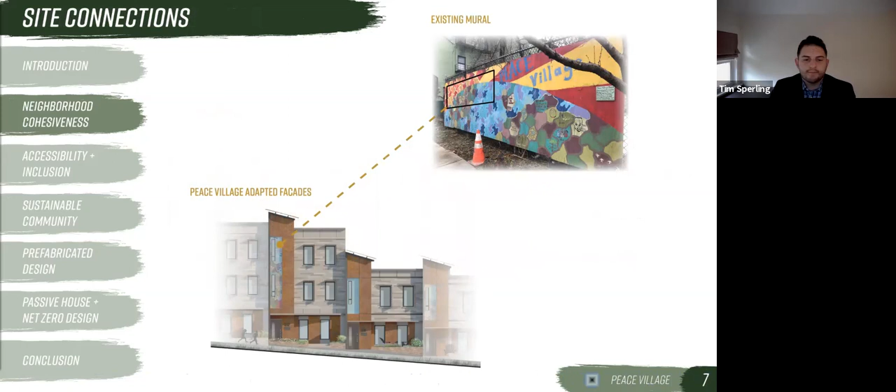To make Peace Village physically accessible, we placed our 2 accessible units on the south end of the site, which is at the bottom of the hill and closest to the parking, which provides the easiest access to these homes. There's also an accessible path that leads to all of the units whose interiors have been carefully considered to follow

ADA guidelines. And then in terms of financial inclusivity, our project has been designed for those living under a 50% area median income. This qualifies Peace Village for low-income housing tax credits, which help fund the construction of the homes and reduce overall costs for residents. Our homes have a slightly higher upfront cost than typical construction, but our passive house strategies reduce long-term costs.

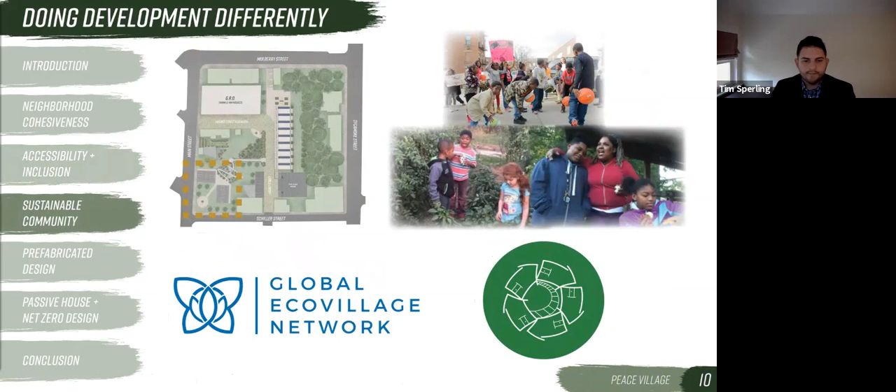Creating plentiful green spaces across the site is one way that this project illustrates this concept. These spaces not only make the site more enjoyable for the community, but also act as a cohesive water management system. Bioswales, permeable pavement, and a stormwater collection system all work in unison to naturally drain and filter water.

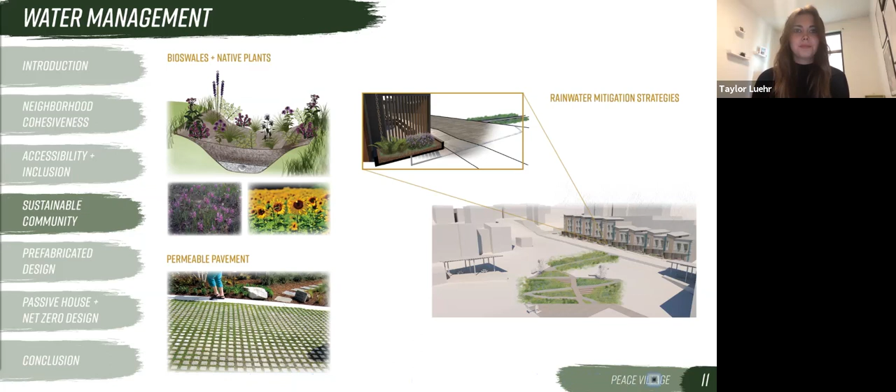Moving on to our fourth design goal. Our fourth design goal is to use prefabricated design methods. BuildSmart provides us with building envelope systems that include custom prefabricated panels constructed off-site to mitigate factors such as cost, energy use, and construction time. For the exterior, our project uses the E-wall that incorporates all control layers into one system that is all designed to Passive House building standards.

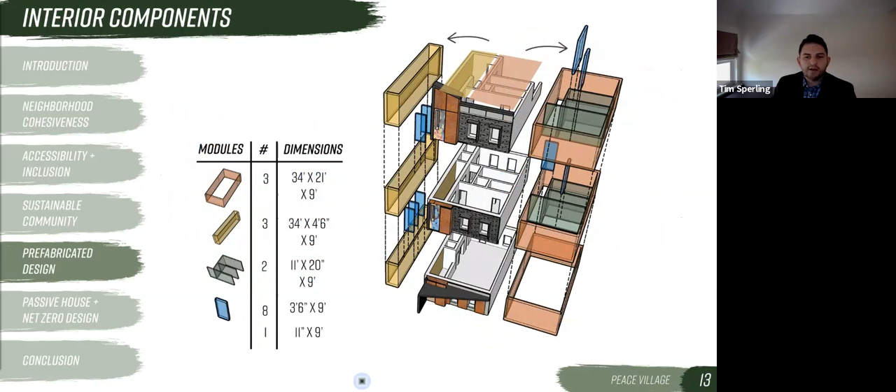Efficiency is furthermore increased with the interior modularity of the unit types. In the diagram shown on the screen, you can see the 3-bedroom unit broken down into its modular components. Each unit consists of 2 primary modules, the residential core seen on the right and the internal circulation seen on the left. This setup dramatically reduces building costs and overall construction time for the project.

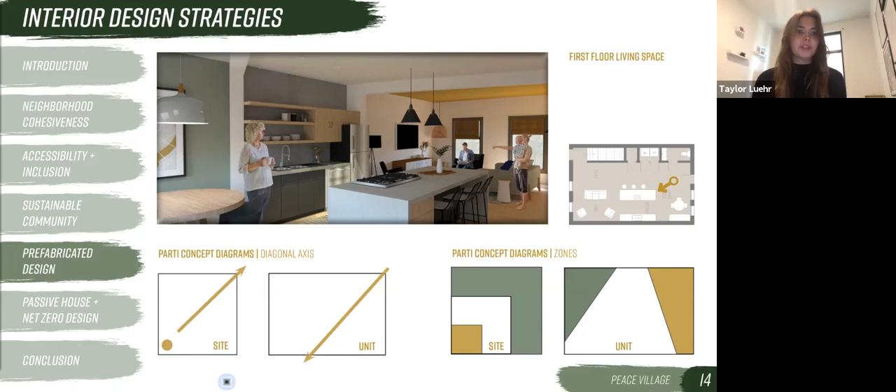The interior design of the units was influenced greatly by the context we were working in. For the first floor living spaces, the 2 dominant design ideas were 1, reflecting the site's strong diagonal axis, and 2, translating the site's tiered zones of privacy and function into a delineating mode at the interior scale.

There were many strategies that we employed to ensure that the indoor environment was comfortable and healthy for Peace Village residents. First, materials were carefully selected with environmental quality in mind. Second, the homes can be naturally conditioned using cross ventilation. And lastly, unwanted noise was reduced through the use of a resilient channel, thick walls, and a carefully selected material palette.

We saved the best design goal for last, and that is using Passive House and net zero practices throughout our project. Peace Village reduces site energy consumption by incorporating several smart technologies that can be monitored through our Peace Village app. This digital space will keep the residents connected, and this is especially relevant today during times of social distancing. We have used several tools to determine our energy consumption and its impacts on our site.

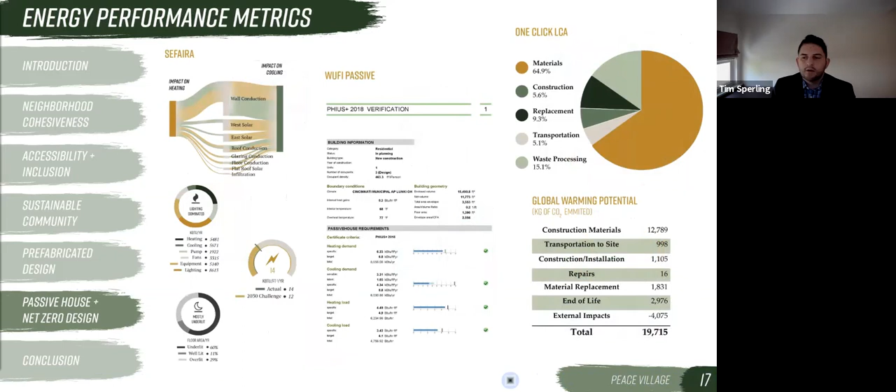WUFI Passive allowed us to meet Passive House standards and reach source zero energy. Sefaira measured impacts on heating and cooling in our initial planning stages, and life cycle analysis outlined our project's minimal global warming potential. All Peace Village homes also meet PHIUS+ 2018 standards that were developed not only to reduce energy consumption on site, but also at the source.

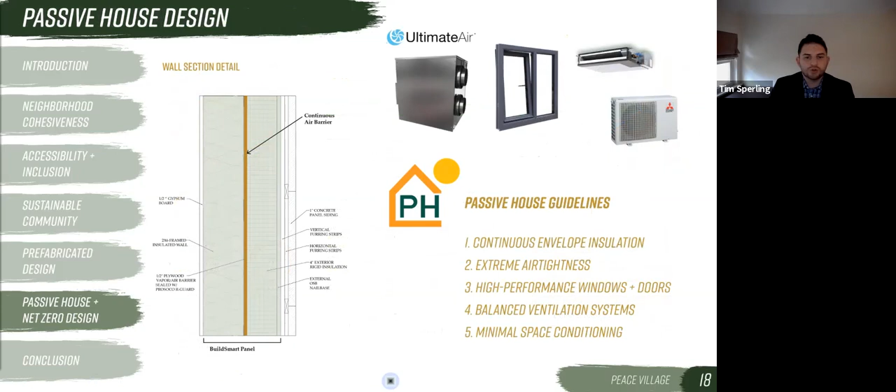By integrating its 5 core principles into our project, we will achieve not only net zero, but source zero as well. We believe that Peace Village will serve as an example of how affordable housing can lead a larger movement towards reducing overall source energy consumption.

While Passive House minimizes the need for energy-controlled systems, renewable energy is used to fulfill any additional demand. A photovoltaic microgrid collects energy from the units and links them to a shared storage system. This allows for excess energy to be sent back to the grid, and then financial savings are split evenly between the homes.

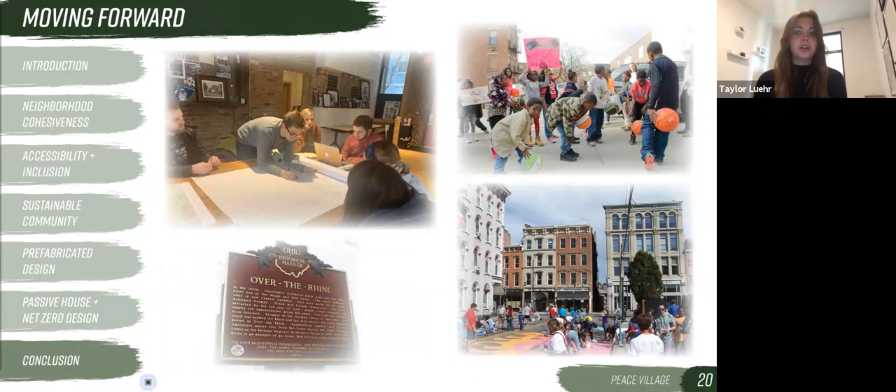The narration you've just heard was not fabricated for the sake of the Solar Decathlon competition. It is a real story with real people and real threats to their community. Recently, there's been talk that the city is slating Main and Schiller to go back out for bidding, which could be the turning point for the long-term growth of this community.

Just want to finish up by saying that some members of the team, myself included, have decided to conduct an independent studio at Over the Rhine this fall, which will allow us to gain more firsthand experience with community members and hopefully push this project to actually be built in the future. Residents of Over the Rhine have been silenced for too long, and now it's time for their voices to finally be heard. Thank you.

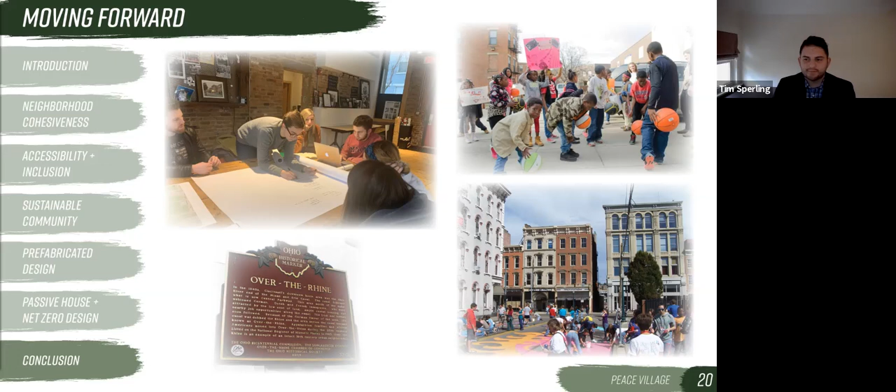Fantastic. Taylor, Tim, that was a great presentation. It's no wonder why you guys were the grand winners for the residential category. That was fantastic. We have a minute or two. We're a little bit over, but we have a minute or two, I think, for questions.

So question for you, why did you guys choose to get involved with the Solar Decathlon? Yeah, I can take that question. Our school, Miami, has been really involved in passive design and sustainability for the last couple of years. We have a professor who was actually our studio professor for this project who promotes this competition that we've been in the past 4 years throughout the department.

So myself and another student from the other Miami team ended up doing the independent study in the fall to kind of prepare for this. And then we sort of promoted it to all our other classmates and just really wanted to get involved in bringing sustainability up to the mainstream of design. Well, we're glad you got involved, that's for sure. Thank you, guys.

So another question here. So how can other young designers like yourselves encourage people to be more conscious and follow this path of energy efficient design and help move the effort to make this become more of a standard procedure across the industry? Yeah, Taylor, do you want to talk about that a little bit?

Yeah, of course. I think you can really encourage students to get really involved with this, especially I know in school with every project we're given. I know at the beginning, they kind of made it a secondary thing. They're like, well, you do the design and then maybe afterwards look at how you can make it more environmental. I think education needs to be altered to where that is like one of the first things you think of when you're designing, and then it just becomes habit for designers to do that. Yeah, absolutely. Thank you.